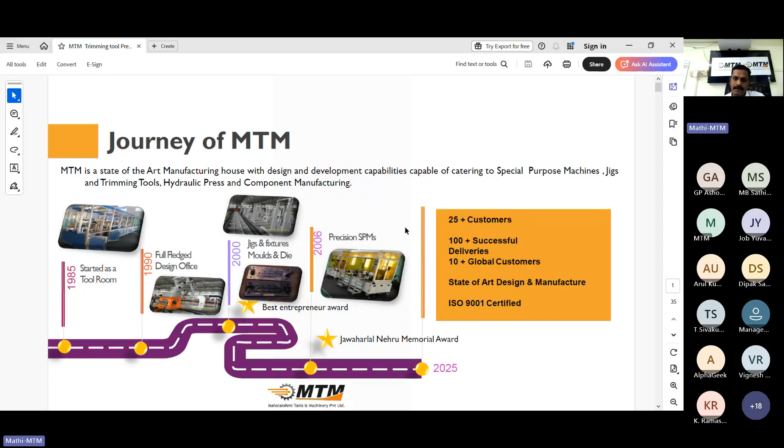Who we are. If you go through the slides, especially we are concentrating on manufacture of hydraulic machines, high precision metal components, and SPM builder for various industries. I'll put up some classic examples as below. In construction industry, automobile industry, battery and jigs and fixtures, heavy fabrication industry, and casting industry.

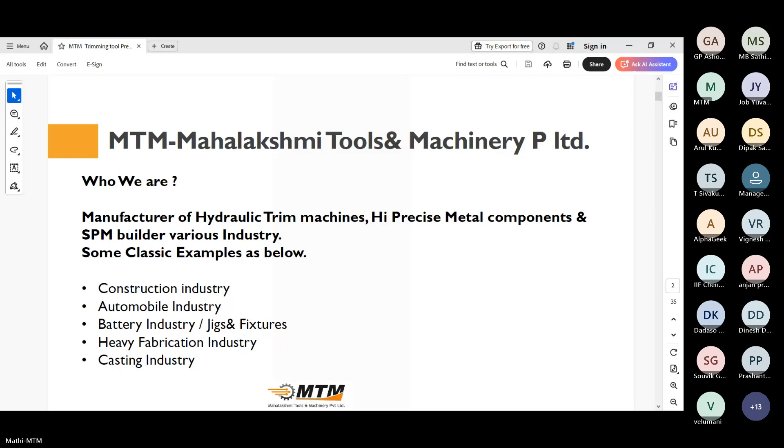Is it visible now, sir? Yeah, it's visible, sir. Very much visible. Yes.

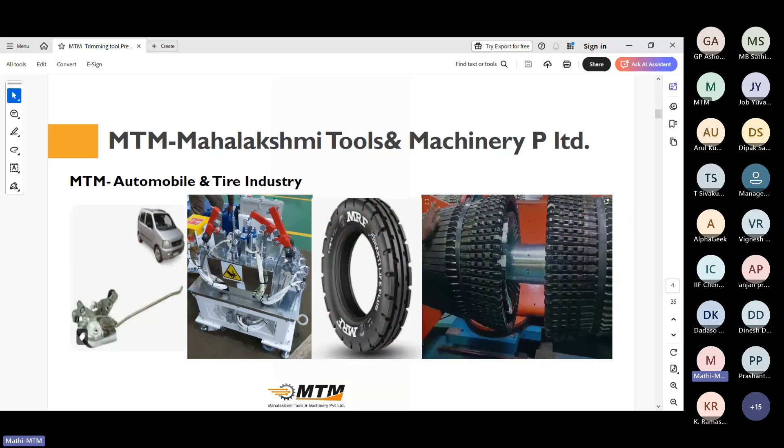Next, we are in the automobile and tire industry. We are making door hinge automation machineries as well as tire manufacturing machine parts. This is for automobile and tire industry. And we are in the battery industry also, and jigs and fixtures also.

We are making heavy earth moving equipment machineries also. This is for that. Machineries we are making to do that positioner, such a kind of welding. We are also contributing a lot.

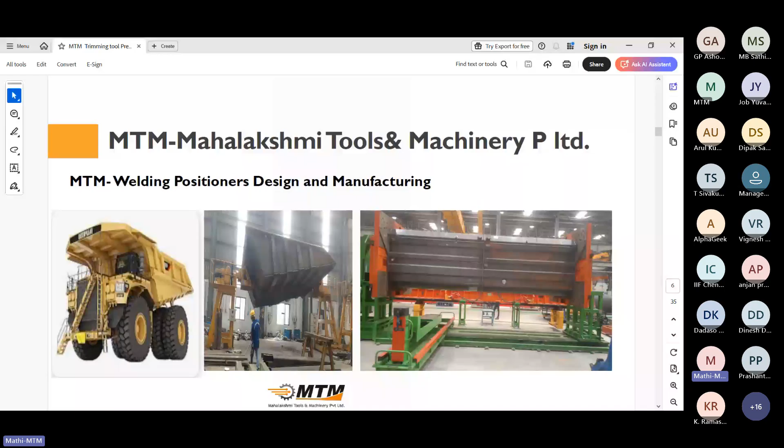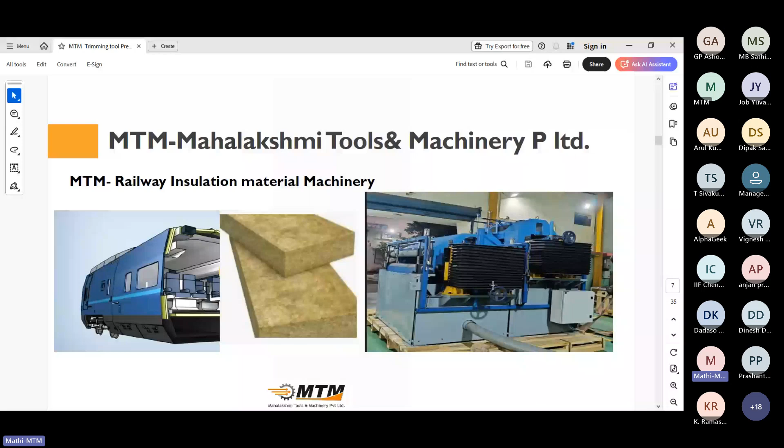And now that new emerging field, that insulation material making machinery. This is a railway insulation material machinery. So we are making these machineries nowadays. We are also in heavy fabrication machineries. If you would have seen this, how big this is, if you refer this photo. Correct, no, sir? Then this is also one of the fields.

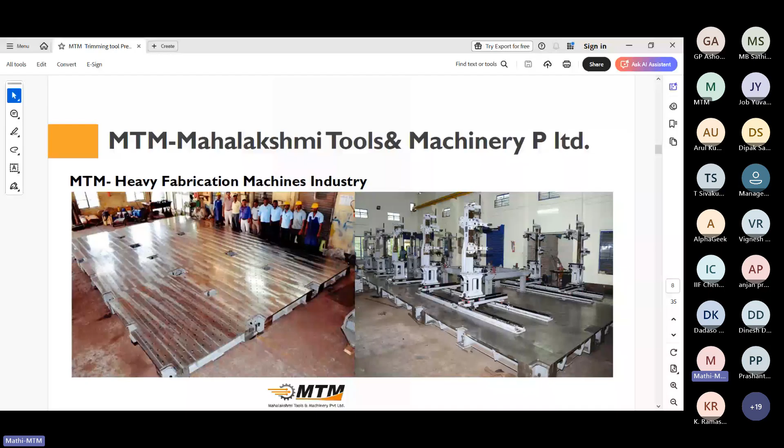So, casting finishing process transformation in India. So this is the heading. Why we need to concentrate on the trimming machines in modern machinery. Indian industry is considerably growing every year compared to other countries. Our average growth rate in recent years is around 6, from 5 to 9. In extreme cases, we reached up to 9, and the average growth is around 6. So every region in India is growing educationally, economically, and work culture wise.

Why am I putting this point here? 10 years back, we were able to get enormous manpower. That poverty rate and education rate, these were very low. So you were able to get the manpower whatever you required and wherever you required, but not nowadays. So this is the point why I am putting it here.

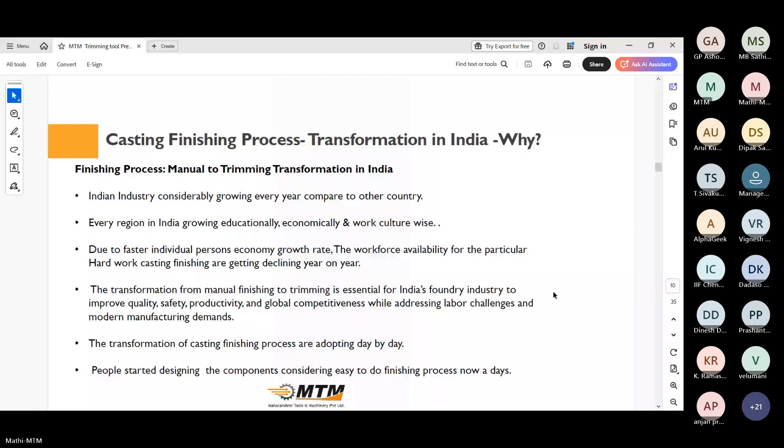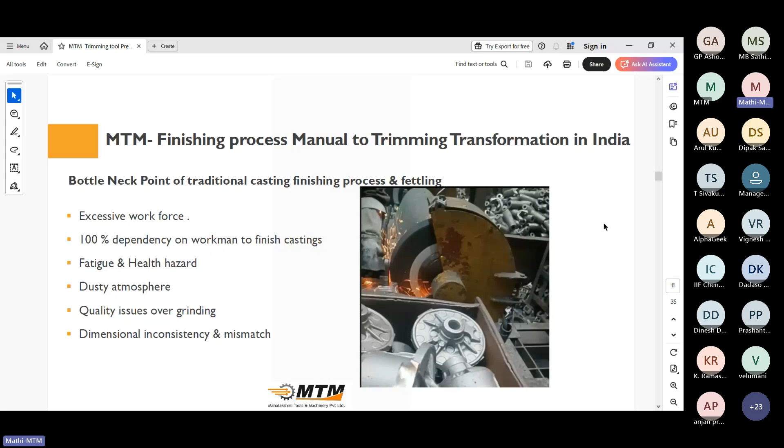To overcome this, we are introducing the trimming process. That means the hydraulic trimming process, MTM trimming machines. So if you see the photographs, this is the environment we require for fettling or other finishing processes. When you go with machines, it will be simple and scalable. Also, it's a neat and clean environment. So this is a big transformation required here for trimming.

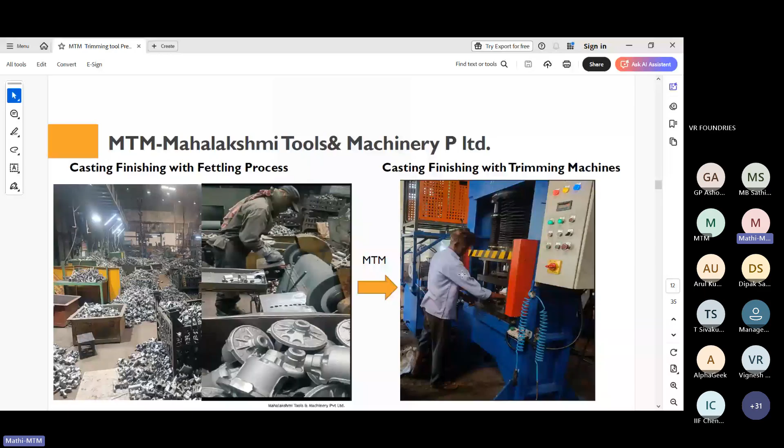Also, in Industry 4.0, we need to monitor each and everything to maintain the output and maintain the productivity. So this trimming process is very essential here. I'm going to share some advantages of the trimming process. The first one is the cost-effective machine and process.

This is capital equipment, and you can get a very short payback period, and the process is also very effective, an easy process. And when I use the trimming machines, the noise pollution is lower compared to the usual grinding process. And an operator friendly work environment we are able to adopt here.

This is the benchmark for pattern size correction. That means when you make a trimming, it will show how your product is deviated from the given dimensions and tolerance designed while designing. So this is what we feel is very important in adopting the trimming process.

All of this trimming in the casting finishing industry. And the other thing is that you can get uniform productivity, and it's easy to increase the production. That means, suppose you are making 1 lakh components and you want to increase by another 1 lakh components in a couple of months, you can increase by simply adding the machine, if you have inventory in raw castings. And the other thing is clean: you can maintain a clean work area here.

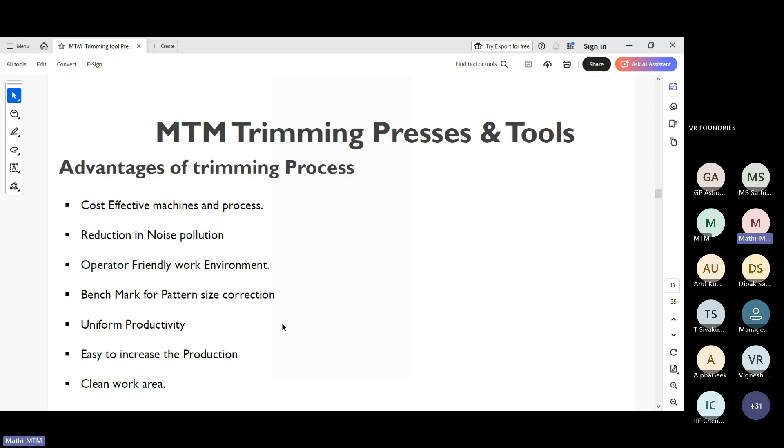Hello, am I audible, sir? Yes, sir. Yeah. Yes, sir. Yes. Yeah.

The other thing is that while trimming, you require a minimum task force, or less labor dependency. So if you have a minimum labor force and you train the forces, you can utilize them throughout the day in this process. Each and every casting will comply with the go and no-go gauges. So it's 100% foolproof, and environment friendly. Here you cannot see flying ash or dust.

And since it has progressive cutting, the parent metal will not be affected during the finishing process. This is a very important thing. While doing bench grinding or other things, some marks will be there on the casting outside. But here you get uniform, progressively uniform cutting edges. Because of those cutting edges, you get consistency in dimension, size, and repeatability. So even with 1 lakh pieces, there will not be much variation in the dimensions. So this is very useful.

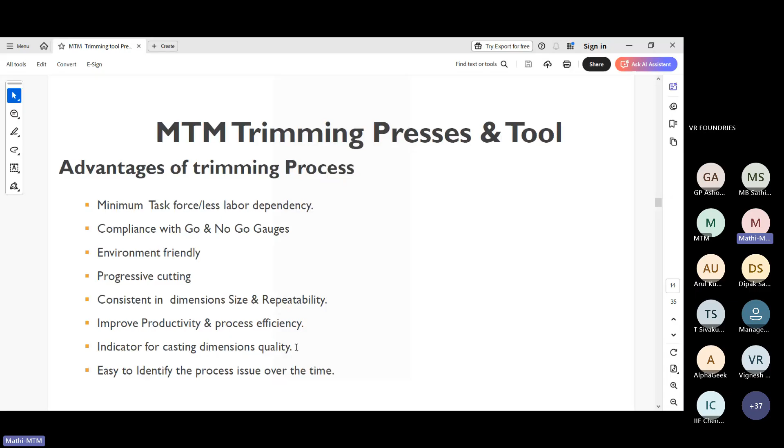And this is used to improve productivity and process efficiency. This is the indicator for dimensional quality. It's not only the dimensional size; quality means finish and appearance, everything is included here. And the other thing is this trimming process will show you process issues over time. Suppose you are adopting trimming machines for your particular product. After 1 or 2 months, if any deviations are found in the dimensions, the machine will indicate the load variation and pressure variations, so you can easily identify material addition or dimensional deviation from your pattern and correct it immediately. So this is very important in using the trimming machine.

And the other thing is that there's minimal secondary operation. Some areas you cannot trim, so only those areas require secondary operation, as it doesn't have a vertical cutting edge. Another thing is reduction in operation cost; the recurring cost is very less compared to the traditional method. Improved and uniform surface finish, this is a very important factor. You will get a uniform surface finish; scratch marks and patches, you will not find anything like that while using the trimming process.

And higher machine utilization, so downtime is very less. That means you can use it 24 hours, throughout the day, all days of the week. Since it is a machine, you don't need any special attention. Since it's a proven technology, minimum maintenance is required. Since it is automated trimming, it has a faster, lesser cycle time compared to other things. Suppose two men are grinding and finishing 1 lakh components; this machine will do it within a shift instead of 3 shifts. So this is the major point.

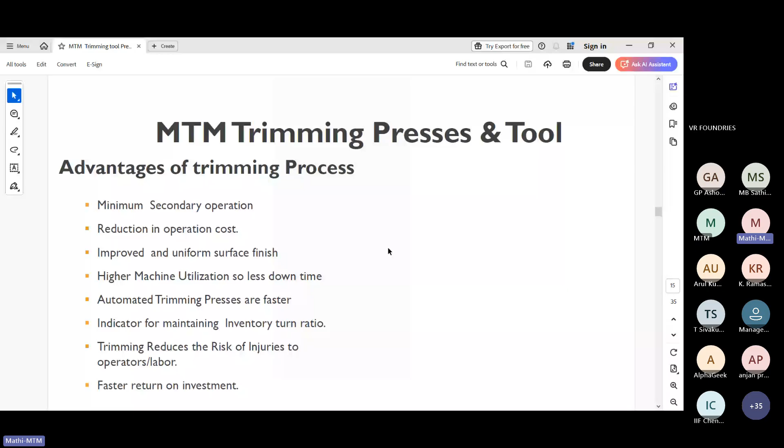Yeah, I'm going to show you our trimming machines using this recent trimming process. We have built so many machines. I'm just putting some slides to understand how big this machine is and the basic cycles, all those things. Are you able to see this? This is visible to you, sir? Satish Kumar, Shiva Kumar, Shardan Kumar. Yes, sir. It's very much useful.

This is a 125 ton hydraulic press. There is a man behind the machine, to understand the scale, so this is almost double the height of the man. This 125 ton press will cover almost all castings from around 12 inch to 16 inches that we are manufacturing today. This is a new development from our side for the piping clamp industry. And if you see, this is the one SPM.

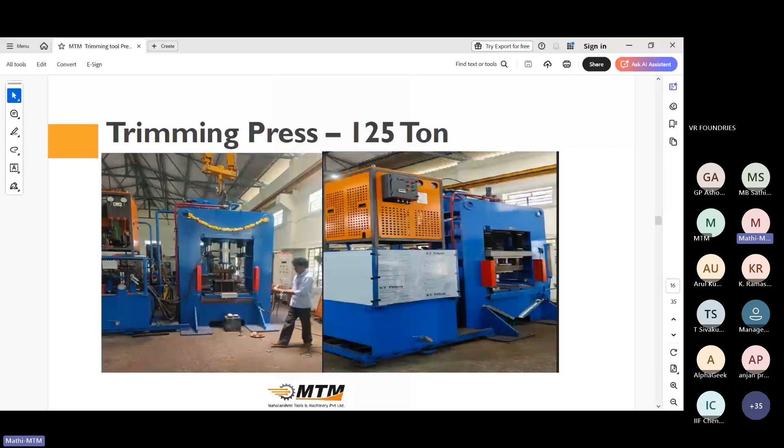In trimming, the general thinking is that we cannot trim other than vertical edges. This is the scenario so far with the machineries we built. Now we tried out this machine, where you can do trimming on taper faces also. That means if there is any inclination, inclination trimming also we can do with these SPM machines. So this is our new product development machine, sir.

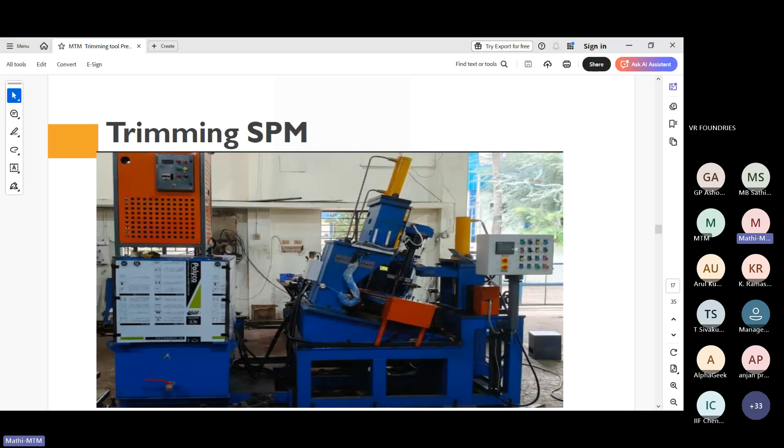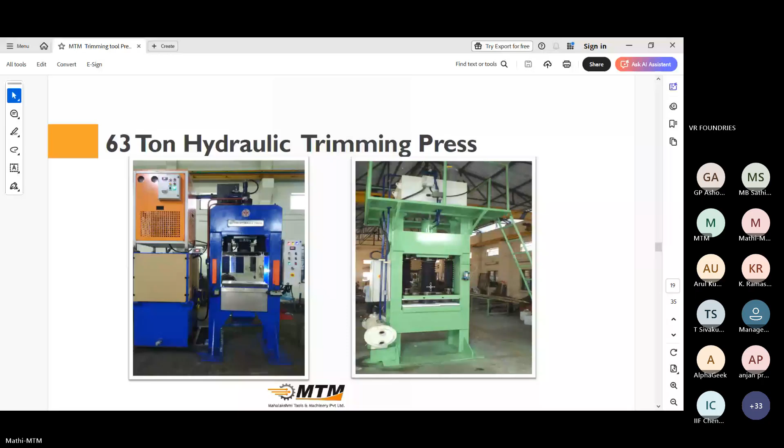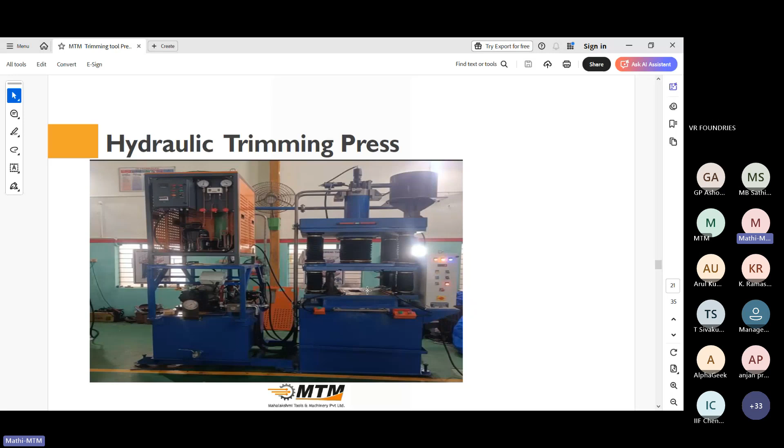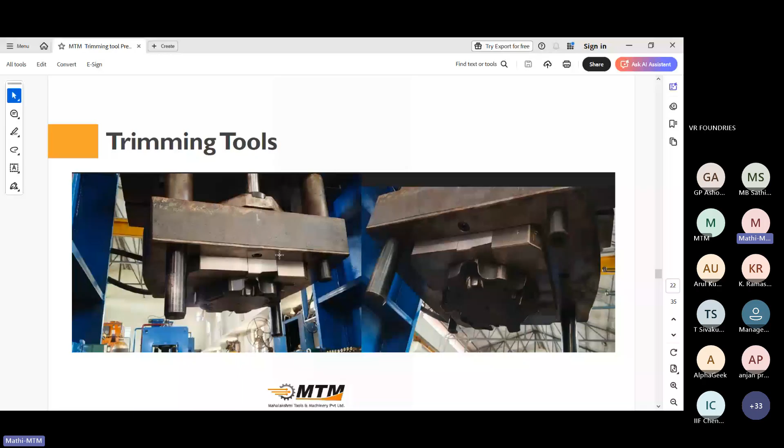This is what typical trimming tools look like. If you see this cursor, this is a tool set. This is a holding device. This is what we call the housing. This is a trimming tool set, as it looks while mounted on the machine. This is what we call a blade; some call it a die. This is a die for the housing and the carrier for the car.

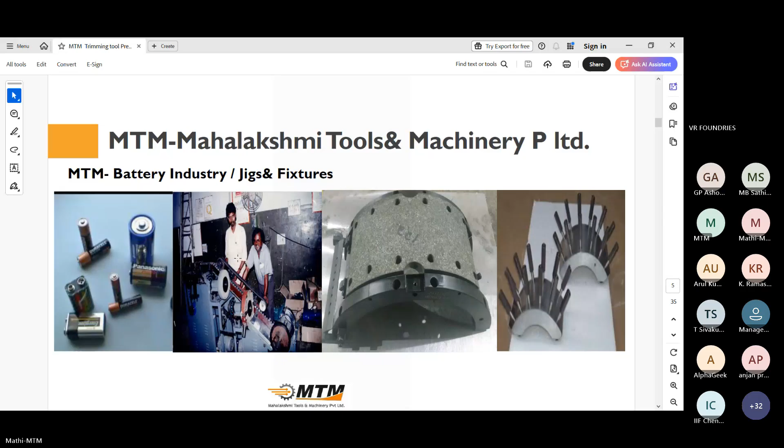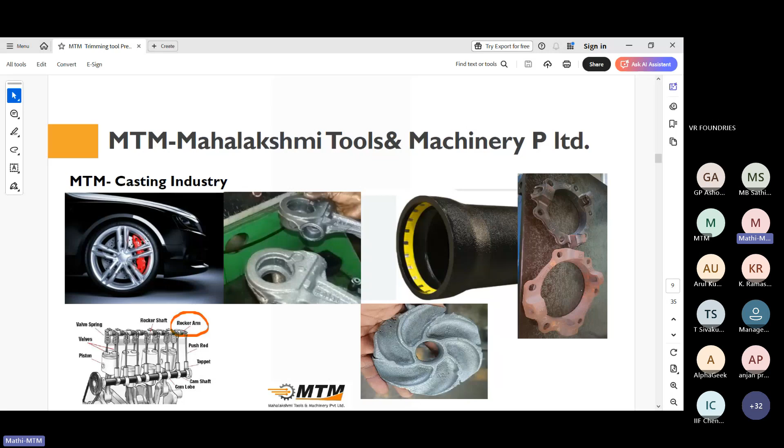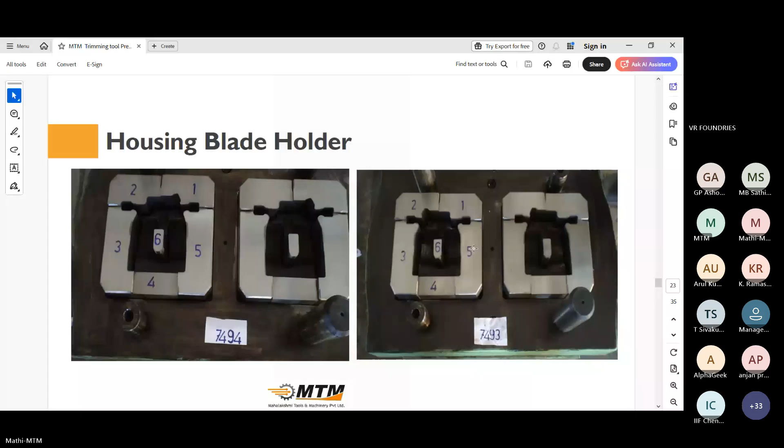In this area there is a disc brake arrangement. For this disc brake arrangement we are making trimming machines. This is the housing; we call it the piston housing. These are the housing blades. This is the disc brake carrier blades arrangement. This is a carrier before and after trimming. This area is the trimmed area, you can see here.

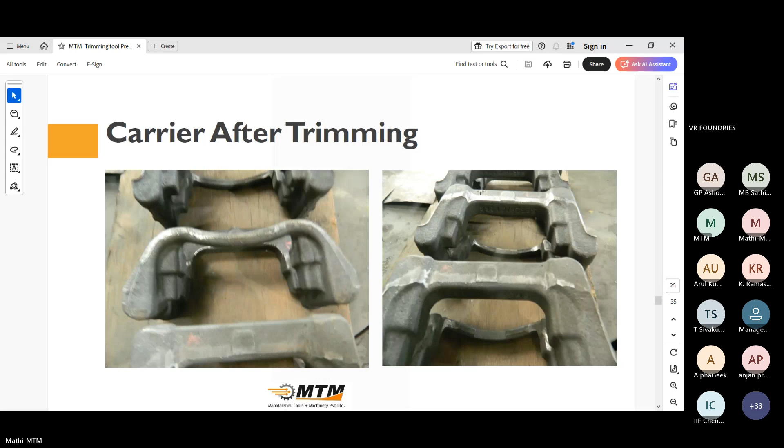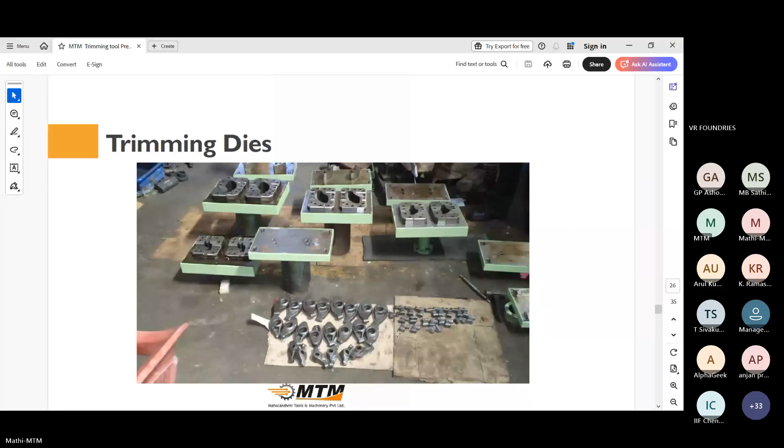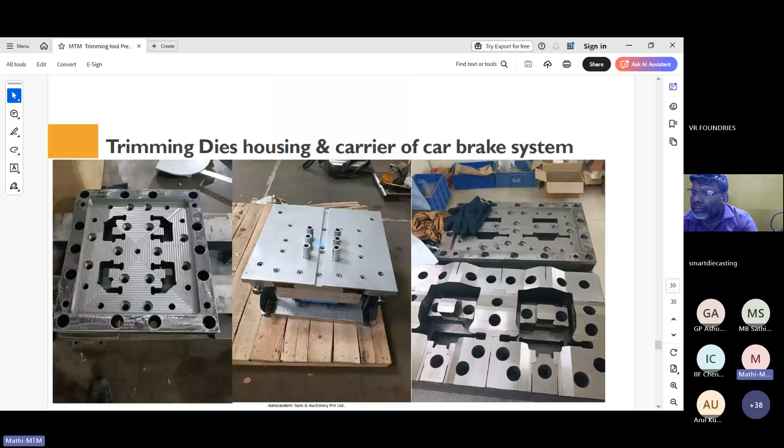These are various types of rocker arm products, which you can use on 30 to 63 ton machineries. This is one of the die sets for the housing. This is also a trimming housing, sir. Yes, sir. This is the trimming machine, RT 690L trimming tool machinery. You can use it for the railway insert. This is a railway insert, sir.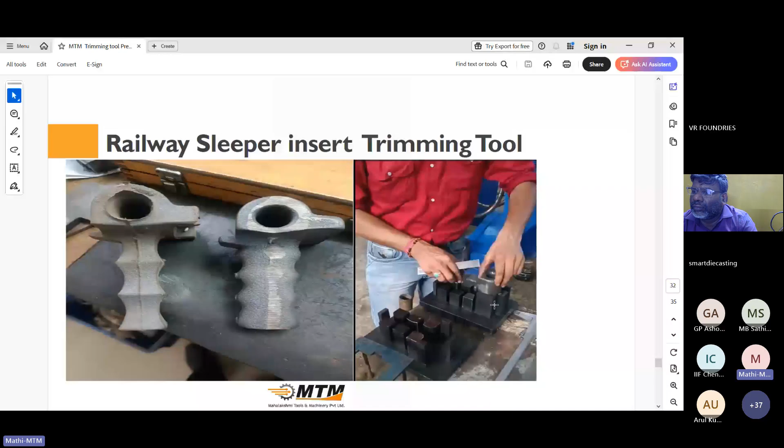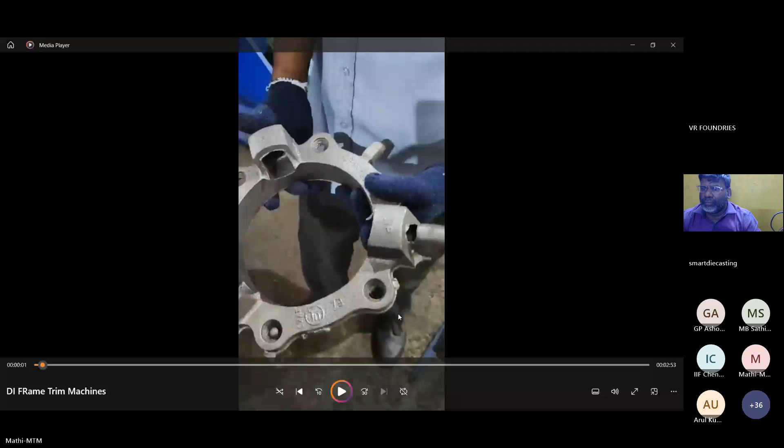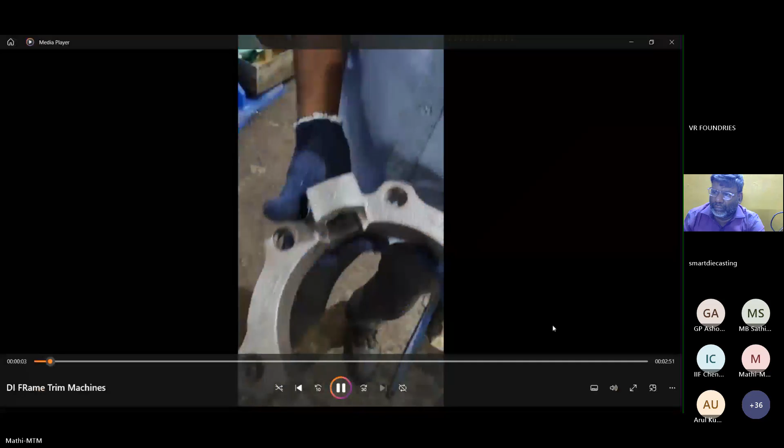Yeah, the videos are playing, sir. Are you able to see the video, sir? No, sir. Is it okay now? Hello? Sir, am I audible? Okay, sir. Yeah.

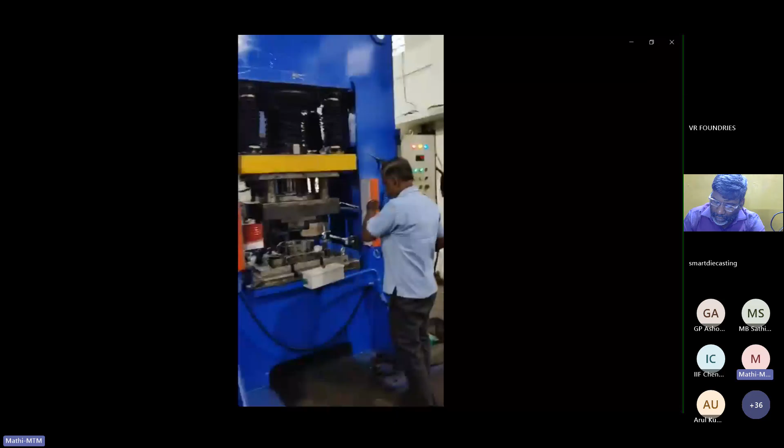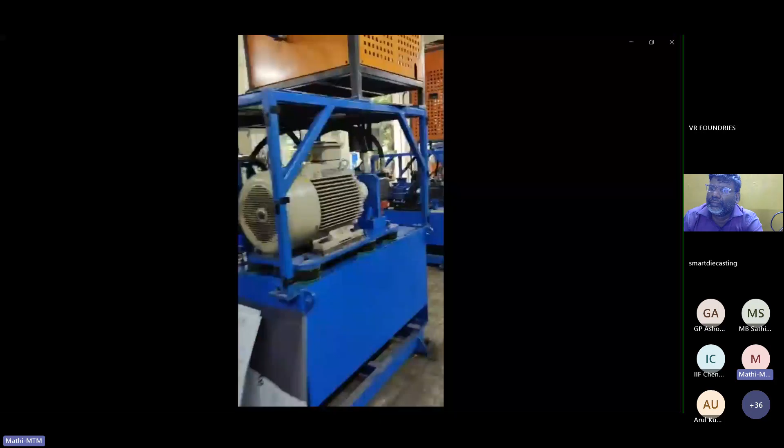This is a DI frame trimming machine. DI frame means a piping clamp for water systems in the cold region. We built the complete turnkey solution for making these things. One is the ID trimming; this is the OD trimming machinery.

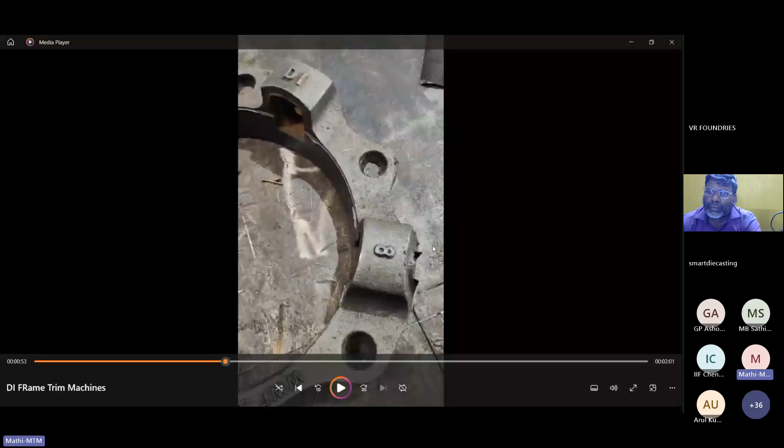If you see, I am just stopping here. This ID trimming is done by another machine. This profile is done by a separate machine. This is an OD trimming machine. This inclined plane of 15 degrees is also trimmed by another machine; we built a separate SPM. That video will come next, please see that. Low cost machines. Low cost. Yes, sir.

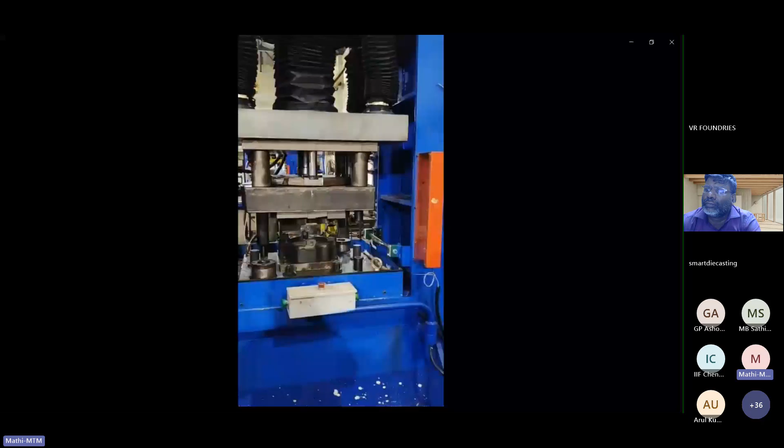It's visible now. We are introducing the coolant system also for these machineries. This improves the tool life and reduces the recurring cost of tools, I mean the resharpening duration, so the life of the tool increases and the cost is reduced. Yeah, this is the SPM machine I told you about, the angle cutting machine.

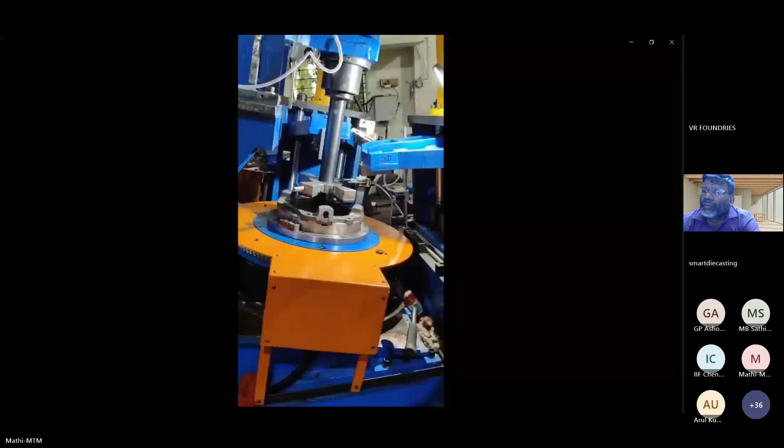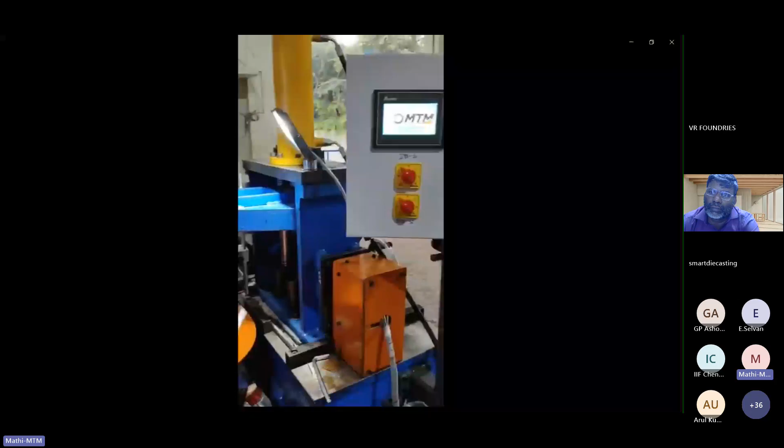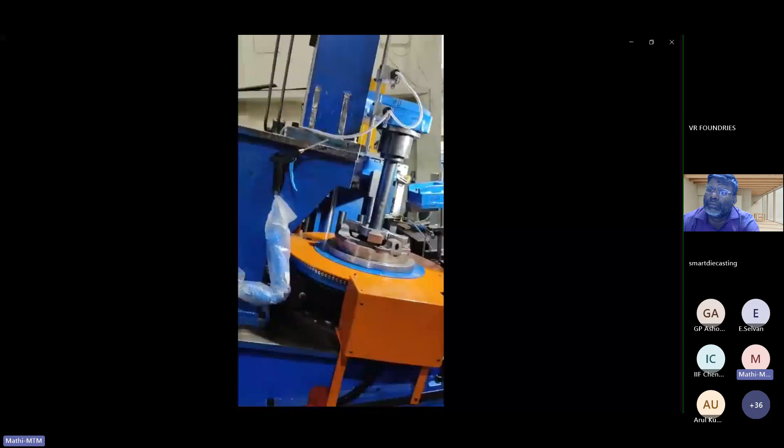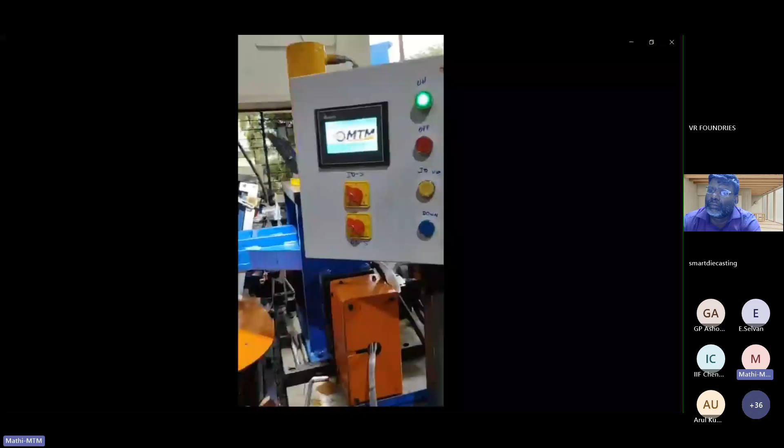Sir, are you able to see this? Hello. Yes, sir. This is an angle cutting machine. We developed this as a low cost solution for this application. This is the recent development in the trimming industry. So this is the benchmark machinery. You can do any angle within 360 degrees, and up to 45 degree tilting also you are able to do. I'm showing you the other video.

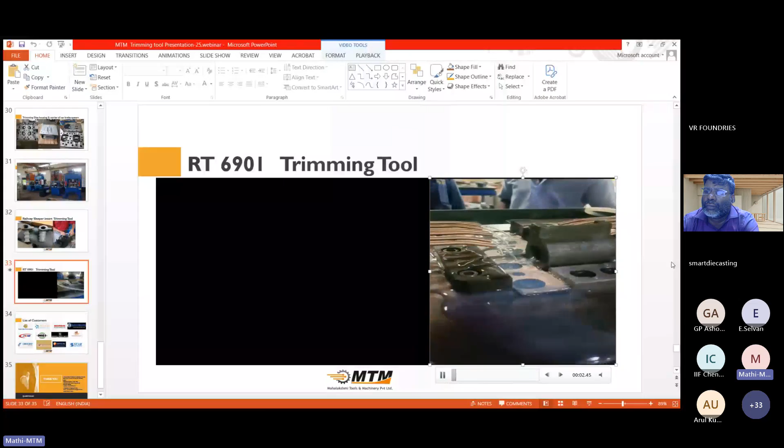Yeah, now it's visible. Hello? Yes, it's visible.

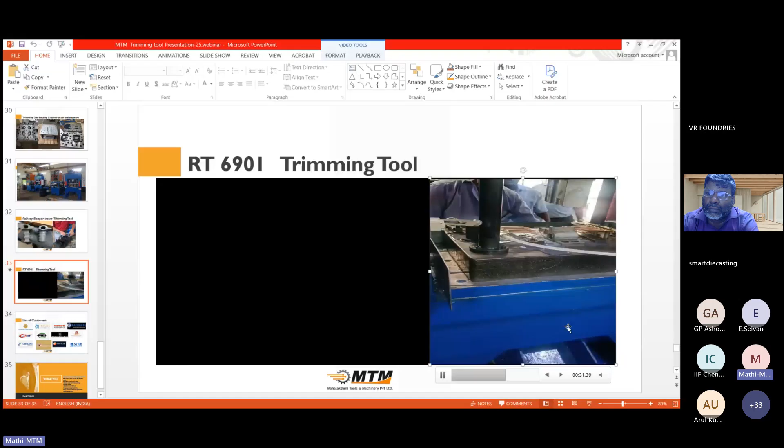Yes sir, this is the railway insert trimming video. If you see, this component is coming behind that, and after trimming this will take only 5 to 6 seconds maximum. This is how we optimize the cycle time.

Nowadays the monthly volume is more than 2 million, I think so. We supplied last year itself around 15 machineries to various customers.

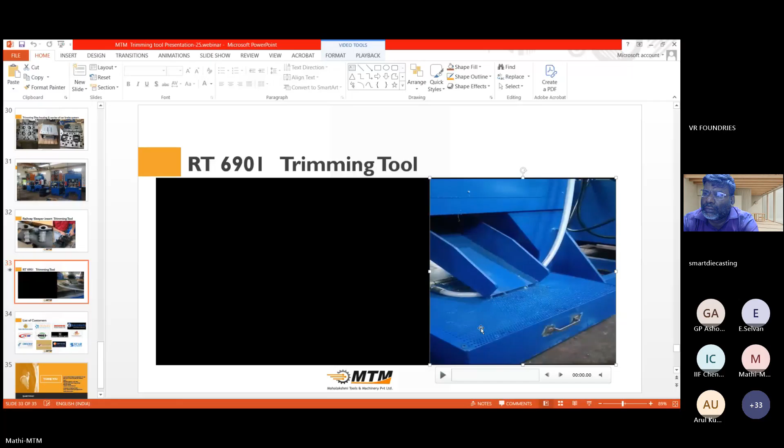This is one more machinery, an entirely different concept. Here the component is pressed and pushed downwards. In this, you have to put the component inside the machine and take it away. So these are two different concepts, and that's why we are showing both.

Both videos are visible, sir. I've seen that.

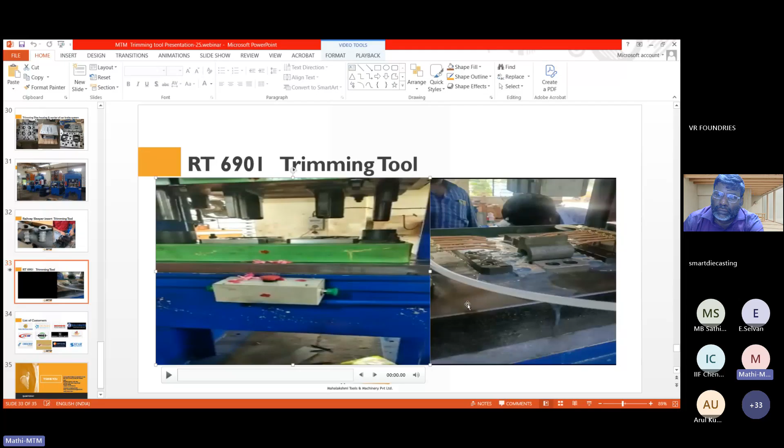Hello. Hello. Yes, yes sir, you can ask any questions now. Yeah, that's it from the presentation. We can go for the question and answer session.

Sir, can you try any cylinder head and cylinder block. You are showing only simple components, okay, like the clamp.

Sir, the reason I am showing this small component is that for bigger, even a 12-inch component, we are able to make a trimming process. We can adapt to any kind of trimming. If you show me the component or send the drawing, we will study it and update you, and provide the best possible solution to you.

Sir, trimming means you can remove the extra projection only. But at the time of trimming, your machine will perform matching between the mold profile and core profile.

Yes, sir. In the final dimension, you arrive as per the drawing, no sir? Whatever is excess of the drawing, we are able to cut that material.

But what form of cutting do you use, grinding wheel or wedge? It's not like that, it works like a knife. This is basically an engineering term, it's a shearing process. Shearing is the removal of excess material like extra projection.

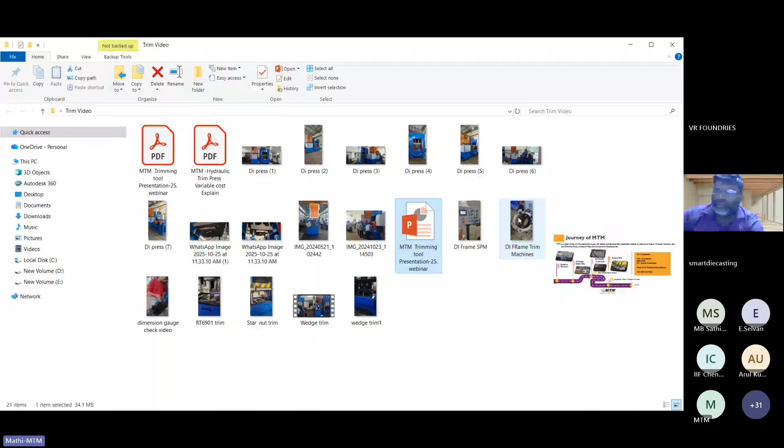Sir, if you're able to see this photo, yeah, this outside is the profile. This component, outside is a profile, and inside also it's a cone, not a circle. If it's a cone, inside is a lesser diameter, outside is a bigger diameter, having some angle, it's a cone.

Generally here the trimming is complicated because we need to cut the cone, and also if you see this area, this plane is tilted with respect to the basic home plane, that means the horizontal plane. So why I'm sharing this machine and video is that we are able to do this outer profile also, and positional accuracy is very important.

While loading every job, that kind of things we are able to do here. So to show that, I'm showing this outer profile, and the inner is complicated, from bigger diameter to lesser diameter, it's a contradiction - very difficult to do.

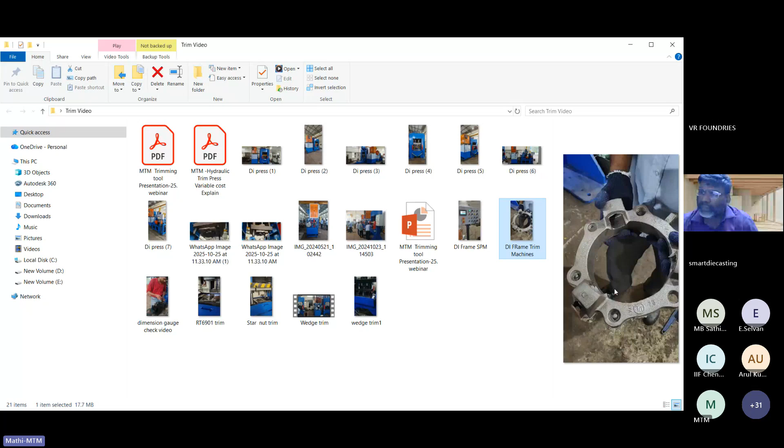So we are trimming the inner diameter also and the top side outer diameter also. We make the perfect cone by controlling the hydraulic element using our precise PLC-controlled machineries. So this we are doing, and outside and inside also pins are there.

If you see this marking area, just a minute - is it bigger now, no sir? Is it okay? These pins have inside cone, these pins have outside plane. To do this trimming, we need to make angular machineries, this also we are doing. So it covers all the complicated areas. To show that, I took this product as an example, sir.

How to select the hydraulic press capacity or tonnage? That's why we are here, sir. For say the materials are different - grey iron, etc. Actually it depends, because it is a cost. Ultimately, the hydraulic press capacity is a cost. If you go higher side, it is too costly. If you go lower side, it doesn't work. Here our vital role is important.